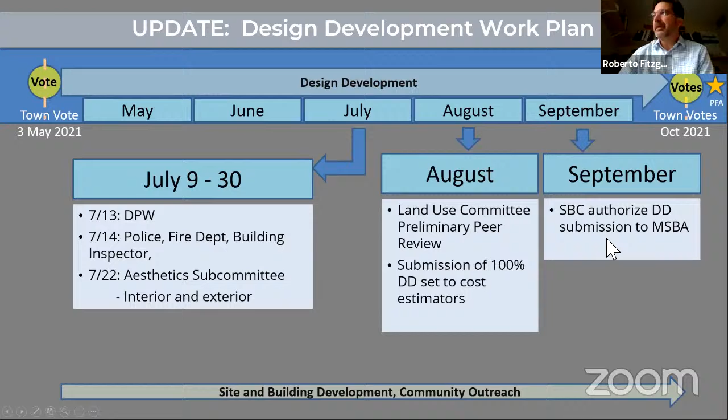We are planning to submit a 100% DD set for cost estimators in August. What Maya was talking about is a 50% set that we would submit in July, but our 100% set is planning to go out in August. And then in September is the SBC meeting where you guys would authorize the DD submission to MSBA.

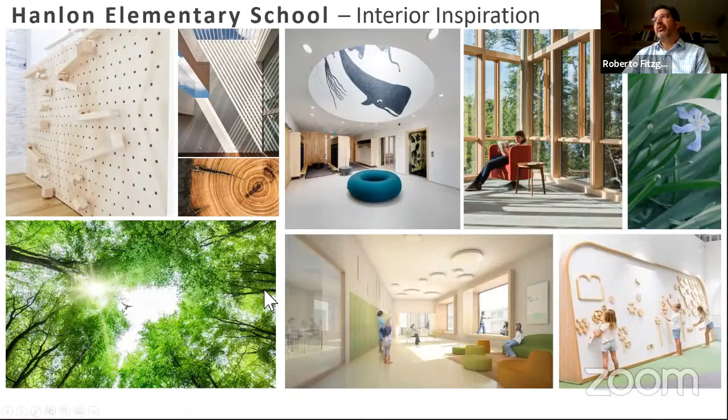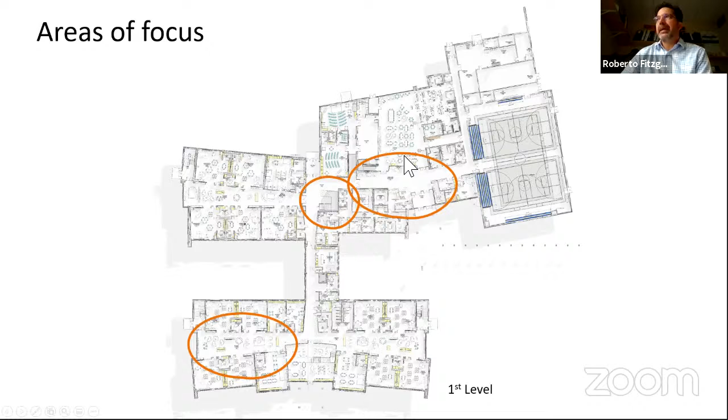So first up is the aesthetics subcommittee. I'm just going to run through these very quickly. What we reviewed was the general look and feel of the building, planning to be a very welcoming, warm tone, neutral tone atmosphere, integrating some elements of abstract ways of light filtering through the building, identifying some special spaces—again, neutral, easy to clean materials. So we reviewed three focus areas: the main entry lobby living room space, the gallery, and the extended learning area.

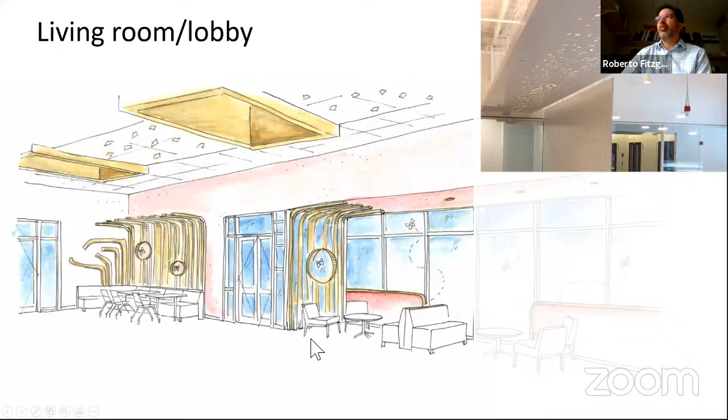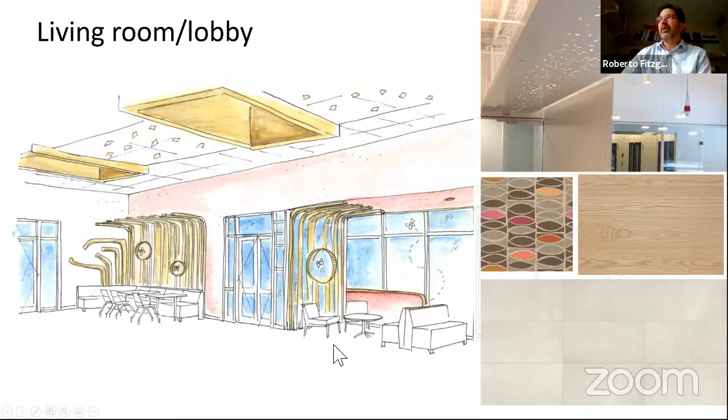And so we're progressing in that avenue. This gives you an idea of some of this sort of light filtering elements that I was just talking about. These are some of the neutral colors and materials that we're thinking about. Still a long ways off from selecting colors at this point, but just kind of giving an initial idea of where we're headed.

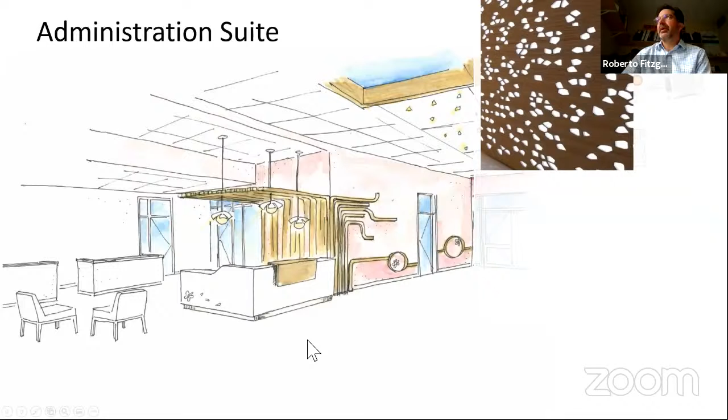Just to interrupt here, Rob, you have to ignore the pink. Yes, because that was not one of the, that was something we made, is that pink is not going to stay. Right.

These are just initial concepts, and like I said, there's a lot of discussion yet to have. But, so this is a view towards the administration area, the welcoming desk. Again, these would be extended up further up to the ceiling, so there's no area up above them.

But this idea of maybe having some interesting light fixtures to again, going with this, trying to bring in this theme of the school in the woods, some natural elements integrated into specific aspects.

We're likely not going to be holding on to these circles here, but the idea is we may look for ways to integrate these at very few locations, but really to highlight certain special spaces.

And one idea with the chair rails is that when we're talking about wayfinding, is to provide a drop in the chair rail that would identify that there's a door opening there. So also trying to integrate things for students with disabilities, and introducing a way for people to visually and by touch recognize that there's a change.

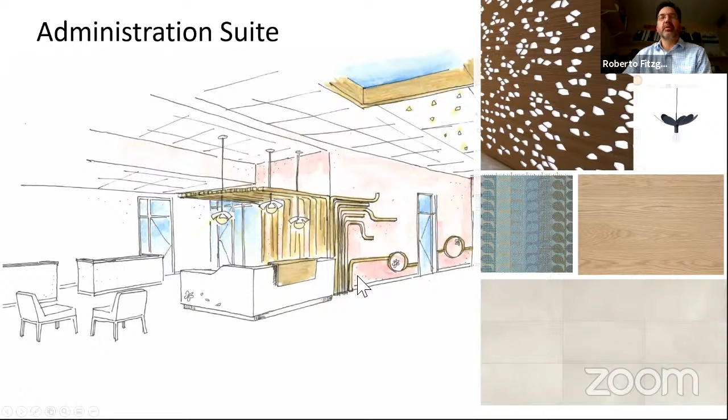We also talked about introducing some sort of a product to use on the wall on the wainscot to protect the wall. We talked about some past projects we've used tile. Really, in this project, we're proposing to use linoleum, and Chin has expressed some experience in that in other schools. So there was some discussion about visiting some other schools to see how that looks and feels. But really, that's the direction we're headed, and it's an inexpensive approach to providing some wall protection.

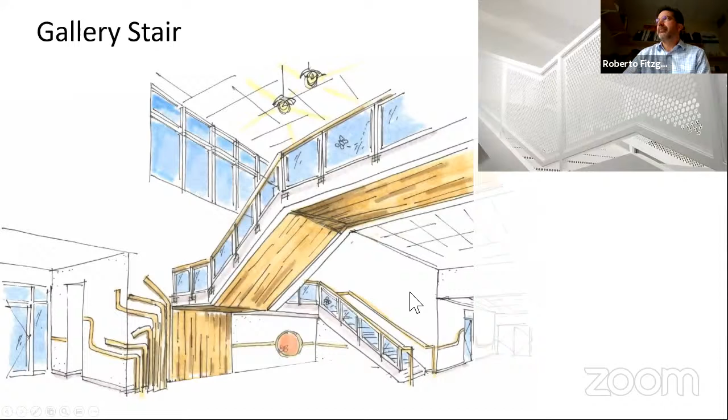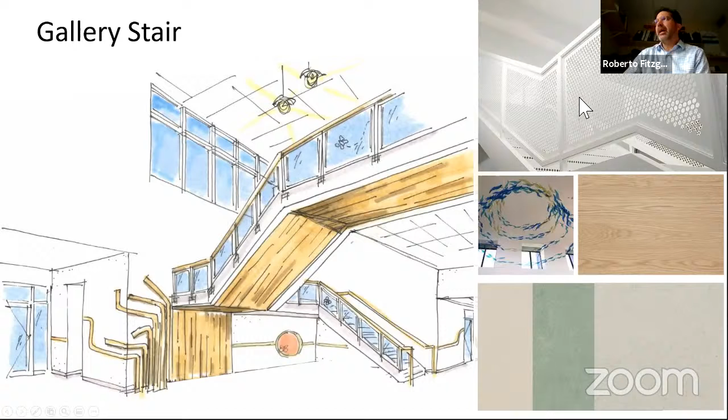We also talked about guardrails and what those might be. One idea we introduced is using this perforated metal. So it's very solid, but it's resistant to anyone being able to latch up, put their foot on or climb or anything like that. It's very resistant to all of that, but it still allows for this transparency and a nice look and feel.

So after some discussion with that, there was consensus that we really wanted to go towards the perforated mesh. As you can see from this image and this image here, that there is some transparency through there, provides a nice solid element for a guardrail component.

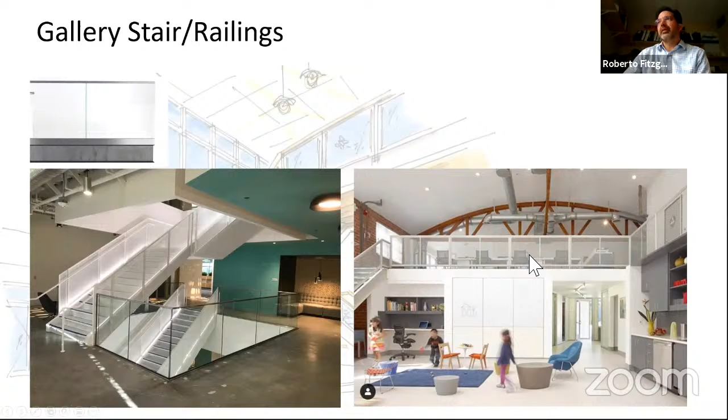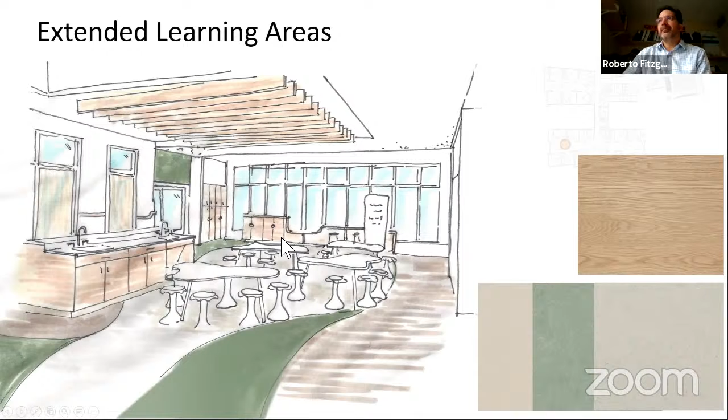In the extended learning area, this is a sketch looking towards the exterior wall where there's all this glass. So just wanted to give an idea of what we were thinking, of highlighting maybe certain areas with a wood slat type ceiling to kind of create this sort of special zone or feel around a certain area. In this instance, this is the science and kind of wet project space in the extended learning area. So it might have this wood slat ceiling to kind of define that space a little bit.

Having this sort of introducing some curves in here. We've got a very rectilinear type building. I'm wanting to introduce some curves in a few different areas to kind of soften things up as we go through the spaces.

In summary, there was agreement on the overall direction with the warmth of the wood and the modern neutral tones. They liked the abstract tree, but want it simplified.

Revise the low ceiling slats so that they're not collecting anything on top. In favor of the linoleum wainscoting. Preferred the perforated metal guards, but not both metal and glass.

Stick to one. We've made arrangements to get samples of the Flotex. I didn't mention it, but it's...

a kind of a cross between a carpet and a resilient flooring. You might see it typically in an airport—it's a very fine, tight pile floor tile. So it kind of looks and feels like carpet, but it's maintained like resilient flooring, so you can scrub it and wash it very easily.

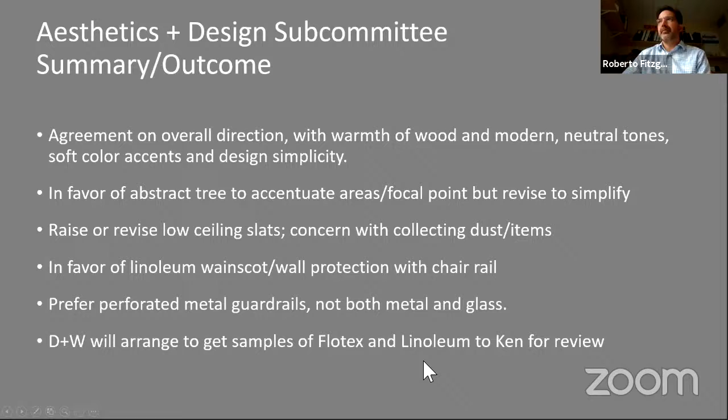So we're sending samples of that and linoleum over to Ken to take a look at. Moving on to the Sustainability Subcommittee, we met and went through the whole LEED certification process and the scorecard.

We also talked a little bit about the electric vehicle charging stations, whether there was interest in the demand response program enrollment, which there wasn't—it didn't really apply to us—and then briefly talked about renewable energy.

So the summary of that is that we're tracking LEED version 4 Silver. We should be submitting a design phase application soon. Everyone continues to agree that the LEED points are not as important as achieving energy efficiency.

We currently have 4 parking spaces for electric vehicle charging, and we should look at providing empty conduit to facilitate adding additional spaces in the future, anticipating there will likely be more EV charging spaces needed, but we didn't want to limit the number of spaces in the immediate future.

Compass will be reviewing Eversource incentives for electric vehicle charging, for example, versus MSBA reimbursement, to make sure there's no issue there.

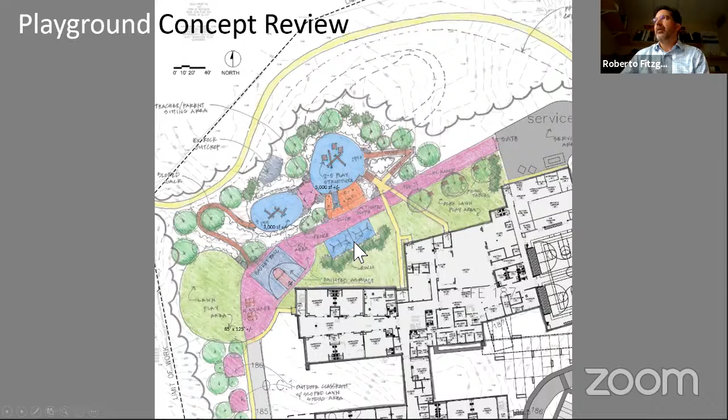Some of the feedback was to integrate swings and maybe a slide, so we've added this climbing element. In addition to students going up with the ramp or stairs, you can also climb up this and go to the upper area and then slide down.

There's a variety of elements and spaces here to allow students to explore. Swings were a popular item we heard about, so we've integrated that.

Because these are additions that weren't accounted for in our earlier cost estimate, we're going to have these priced separately, just so we can see what the add is for.

We've got some plantings here to block a little bit of the view, or provide a buffer from the view from these classrooms. There's also another buffer here between this lawn area and the service drive.

This also maintains the view out from the cafeteria to be as natural as possible, so locating these up on this upper level and off to the side also maintains the views out from the extended learning areas. That was an important piece for where we located these elements.

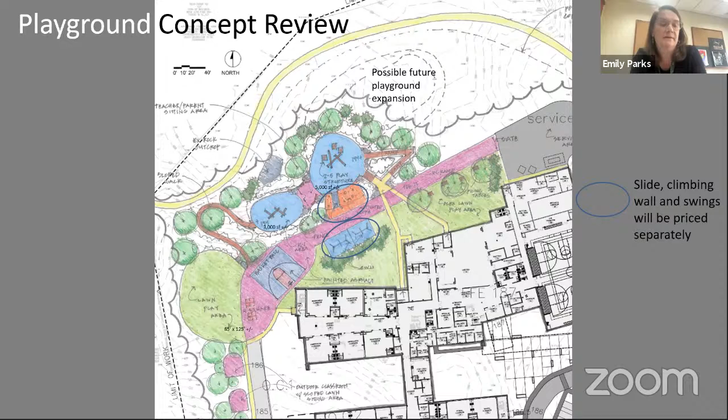Cool, you guys are so thorough. We try.

Anyone else? Yeah, I have a question on the playground. My first question, Rob, is how does the square footage of the playground compare to other schools you've built, in terms of student to square footage in the playgrounds? I'm just a little worried that you might have kids on top of each other. The second is a question: is there any potential to shift the playground a little further up towards the expansion and make the lawn area bigger? Because the lawn area, you couldn't even run a kickball game, I don't think it'd be big enough for that. So that's one question, one comment.

Yeah, so if you look at the total area altogether, there's a variety of different places for students to meet, whether during recess or whatnot. If you look at the overall area of this whole piece, it's about 70,000 square feet. So if you think about students meeting on picnic tables, the swings, the different play structure areas, the basketball court, the foursquare, or the lawn area, there's actually quite a big area. Each school is a little different, a lot of it is dictated by how much land is available at each school site and how much they want to spend. It's really those two things, right?

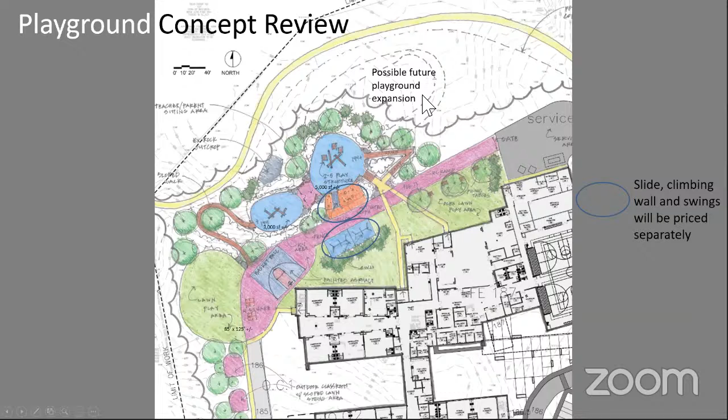Maybe there's ledge on the other side where that future expansion could put the field there. And now, again, leaving aside cost, I know cost is a component. Yeah, and that's why we indicated here as possible future playground expansion. I mean, anything's possible with money, right?

A 6v6 soccer field is much smaller than a regular size soccer field, and that's for elementary kids. How big is a 6v6? It's like a third of a regular football field or soccer field. I'd have to look it up, I don't have that off the top of my head, but I think that's roughly the size of the area you have there.

Oh, it looks okay, I just looked it up really quick. It's in yards, 45 to 60 yards in length and 35 to 45 yards in width. So about 100 by 60. It's not quite exact, but it's in the ballpark.

I think this lawn area looks a lot bigger than it looks on the field, on the design. But look how small the classrooms are comparatively. Yes, it's the whole wing. Classroom is somewhere between 25 and 30 feet long.

At nearly 2 acres of land, there are schools in more urban areas that build a 400 student elementary school on a similarly sized piece of land, just for comparison.

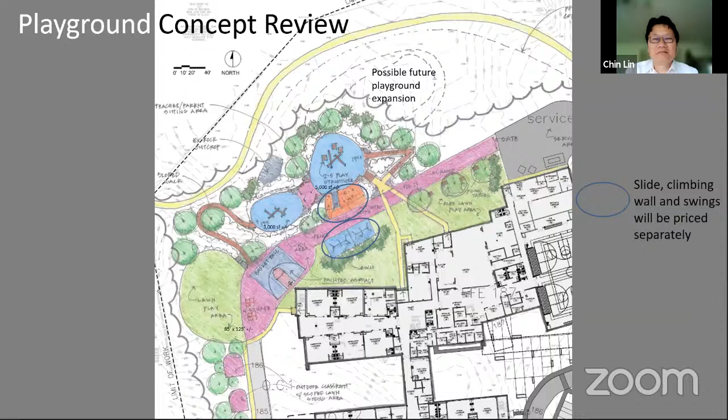Okay, great. Tony, do you have anything else? No, that's all, thank you. Okay, I think Mike has his hand up.

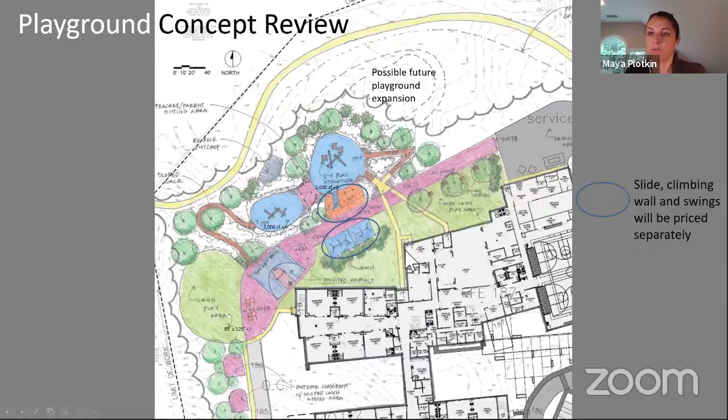Oh, sorry, all right, so my question is this, and I sent a text to Chris Coleman just so you know. I'm one for open design, but I worry about safety concerns with such an open design, especially coming in the lobby. I'm just wondering if I'm the only one with that concern. I know we live in a tiny town, but history will dictate that's where people are more prone to have safety concerns. And I'm wondering if I'm just the only one, and that's okay if I am.

Mike, so do you mean coming into the lobby and having it be open to the cafeteria? Yes, that would be the first place. Yeah, it's probably the most, I would say, most dangerous, right? Because you have to get farther into the school before anything else happens. But yes, such a wide open design. Where is the safety concern that we spend so much money on looking going forward? It seems to be that we've thrown that out somehow in this design.

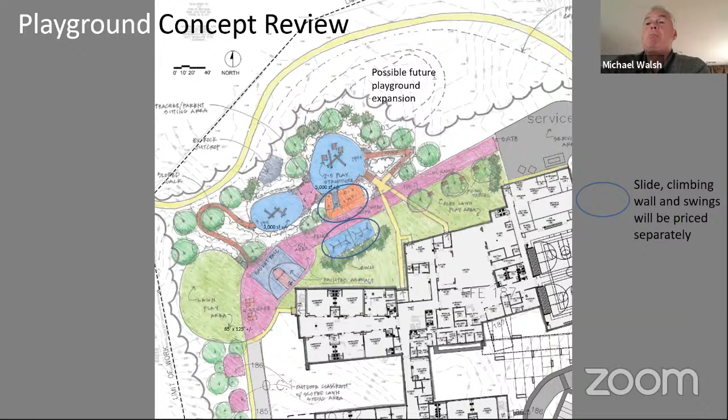Rob, can you go back to the lobby slide? Yeah.

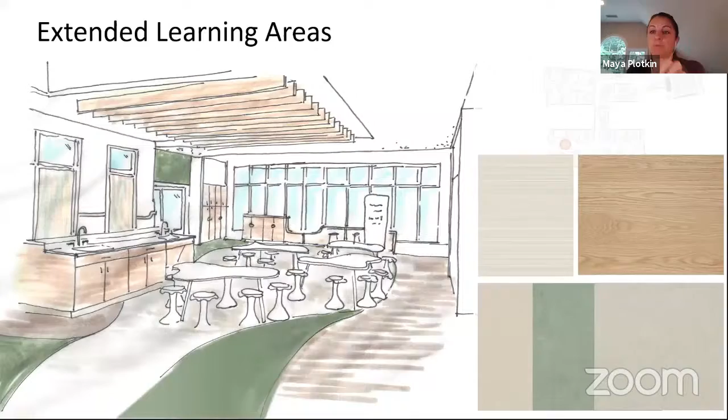So there is a two-step process to get into the school. There's a vestibule first before you even enter the school that's locked, that you need to be buzzed through. So you're buzzed into that first vestibule, you say who you are, and then you're buzzed into the main lobby.

It is resisting forced entry. Based on the manufacturer's tests that they've done, someone can't get through these doors by battering it with a hammer, a bat, or bricks for like 10 or 12 minutes. You cannot get through there.

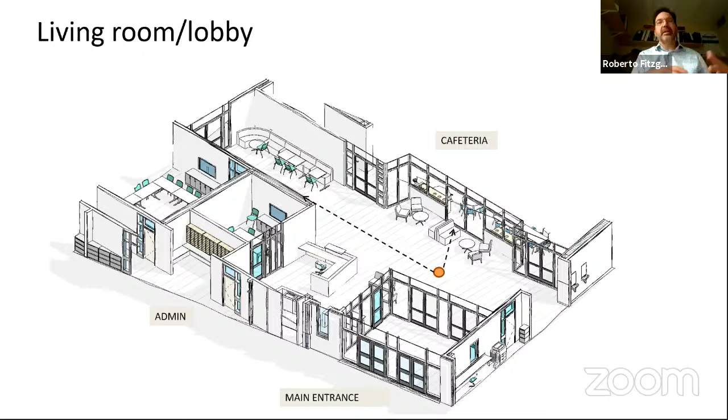And so our intention is to have a combination of some natural features and maybe whether it's seating or blocks of some sort, so that it doesn't look like, oh hey, there's a barrier here. It's more of an integrated element into the design that naturally does that. Okay, thank you.

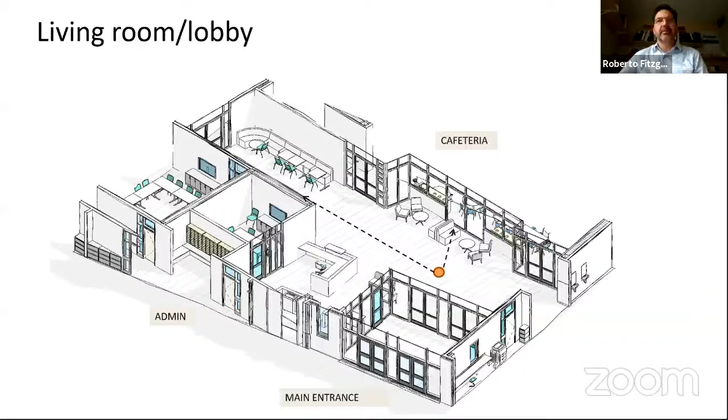I've got one more slide to just touch on. Is there anything else on anything else that I've shown? Does anybody have any other comments or questions? Okay, let me see if I can.

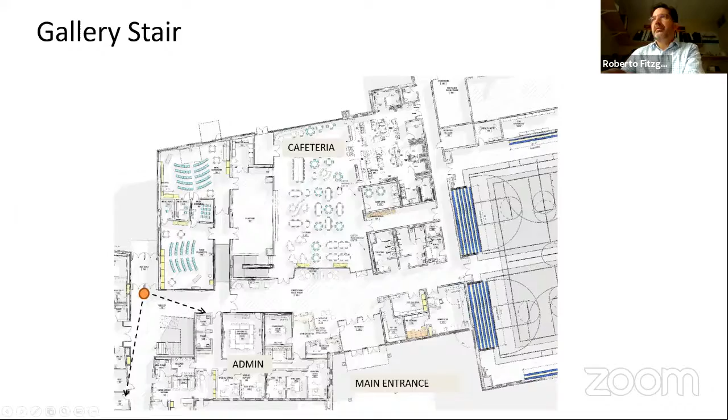So I mentioned briefly the thermal insulation. We've got a number of proprietary items, and this is just to give you a heads up. On public bid projects, we are required to list 3 manufacturers and allow for equivalent submissions of items or materials. Sometimes there are certain items where we can't find 3 manufacturers - they're just not out there making an equivalent type of product, for a number of different reasons, whether it's how it's manufactured, how it's installed, or the specific product that makes the most sense for the town or school district, because that's what they're doing in other schools in the district.